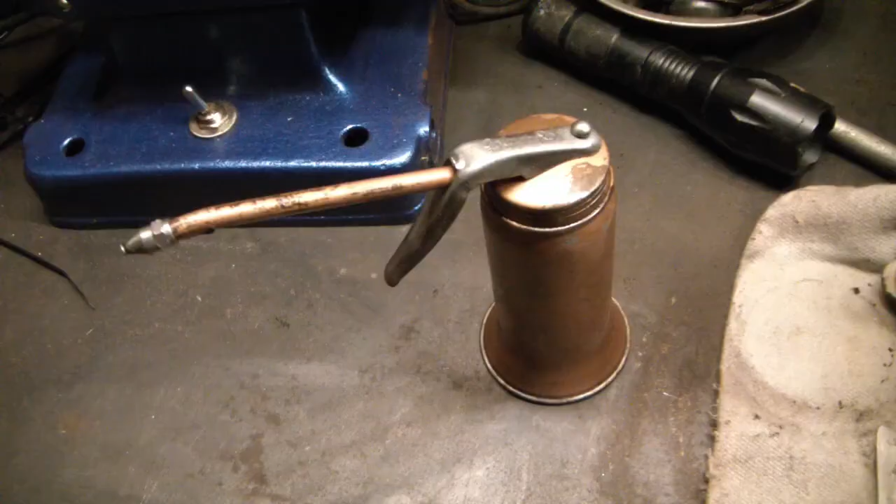Hey Toolerinos, we all love our oil cans, right? And this Goldenrod from a previous video has this flared out bottom to make it more stable, so it doesn't fall over so easily. So it's awesome, right?

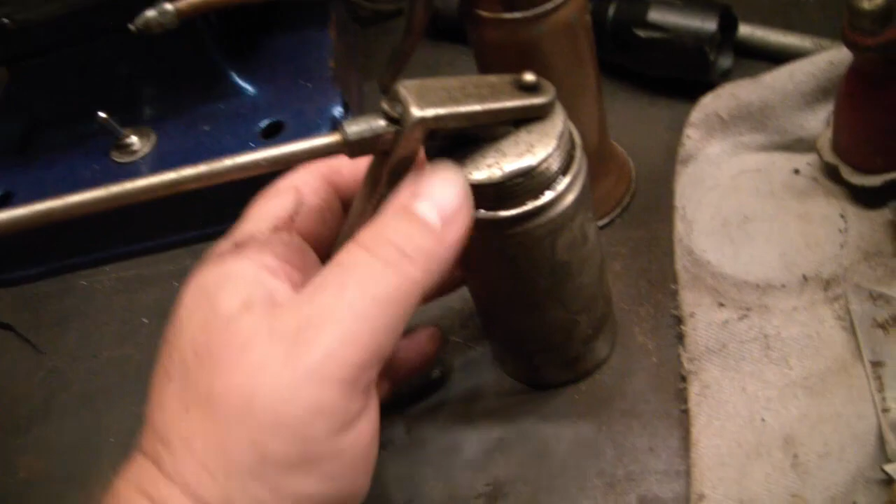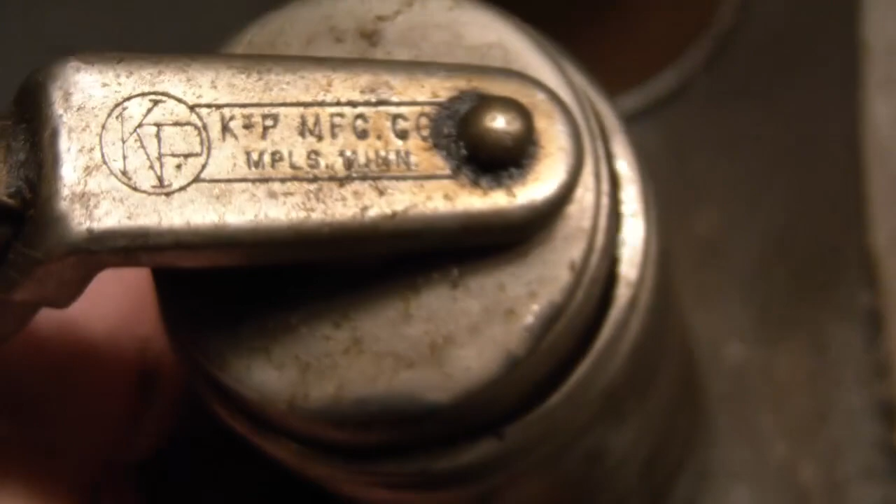A lot of times you see oil cans like that, and they're just straight bottom, and they fall over too easily because they're top heavy on one side, especially if they have a long oiling rod like this. And this is a pretty nice oil can. Let's see, it's K&P Manufacturing Company, Minneapolis, Minnesota.

So it's a nice oiler, but wants to fall over, right? Well, I picked this up at an estate sale, and look what was still attached to it. They had a little flared out base that you could set it in so it doesn't fall over. Pretty nice, huh?

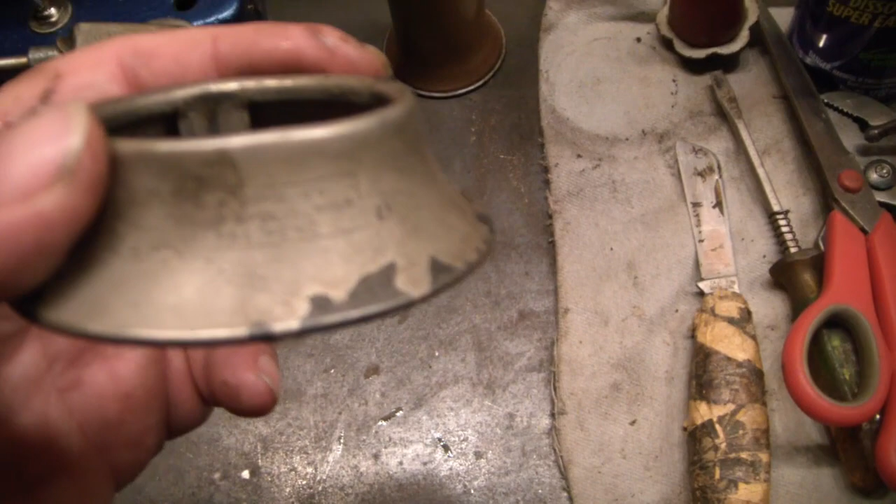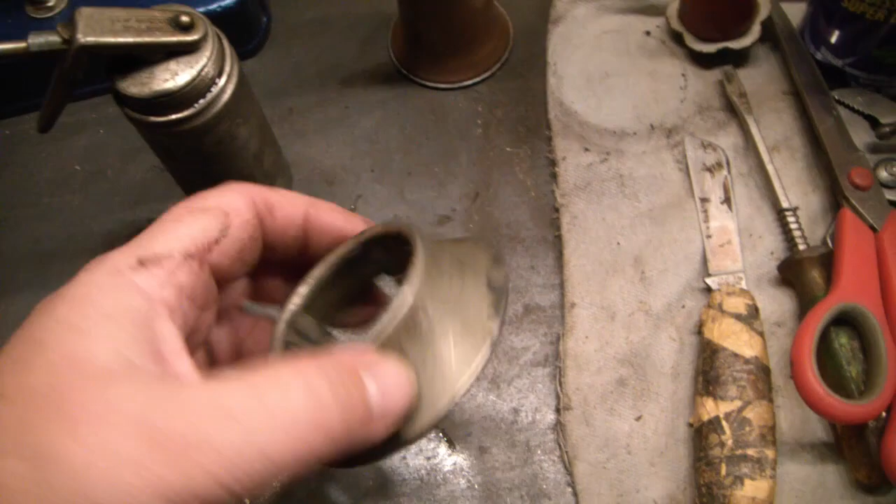Maybe a lot of them came like this, but they got lost, the little support got lost after a while. There it is, KP Manufacturing Company, Minneapolis, Minnesota, patent pending. Yeah, they patented it. That's why it's not on everything. Or they tried to patent it. I don't know, I'm going to have to look up that company and see if I can find a patent. If I do, it'll be inserted.

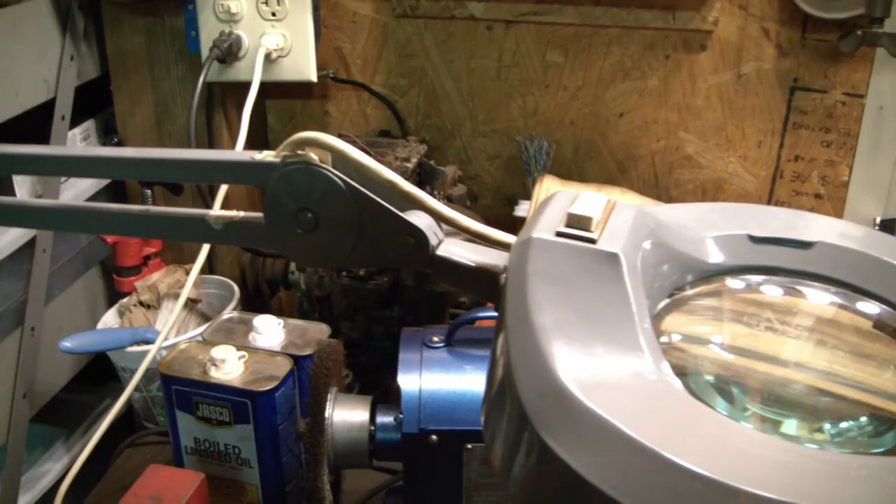Hey Toolerinos, I bet you're wondering what's attached to this arm. It is something I've been looking for a long time. I now have a proper industrial grade light of truth.

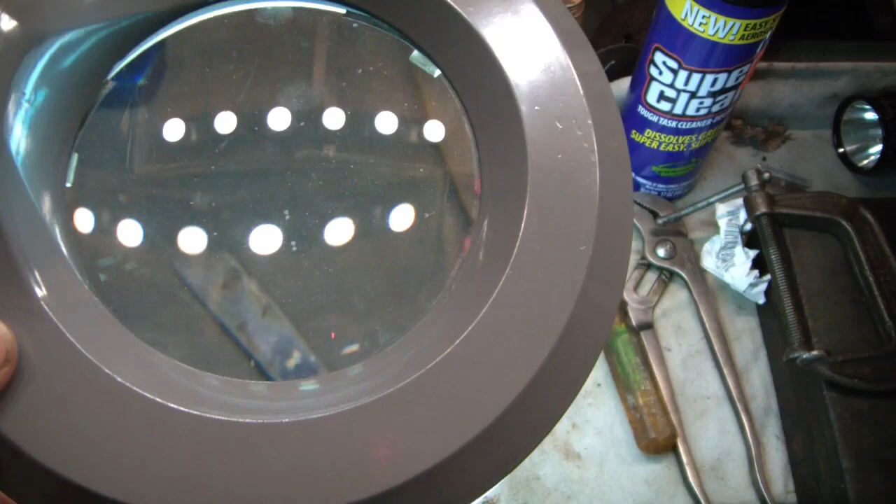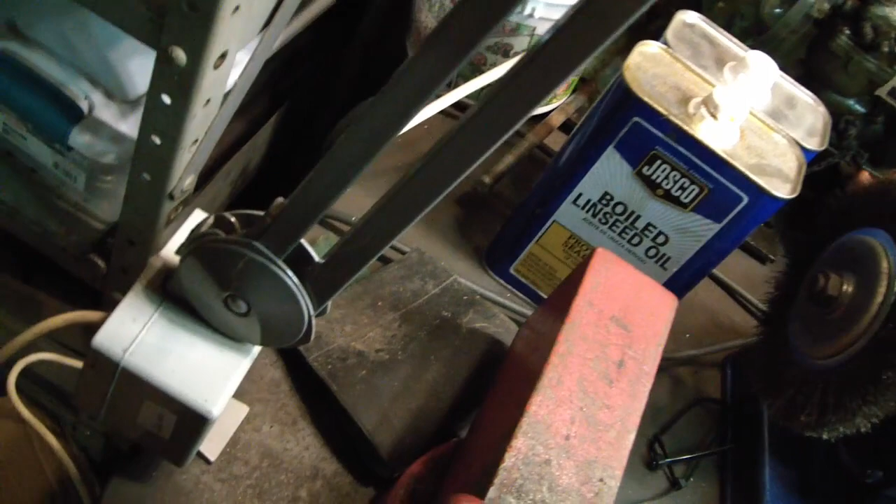Look at how well it magnifies. And it's got the fluorescent ring light underneath, and it works. So this is going to make a great addition to my shop. And it is a heavy duty type grade. The best part, I picked it up at Buckeye Salvage in Canton, Ohio for only $20.

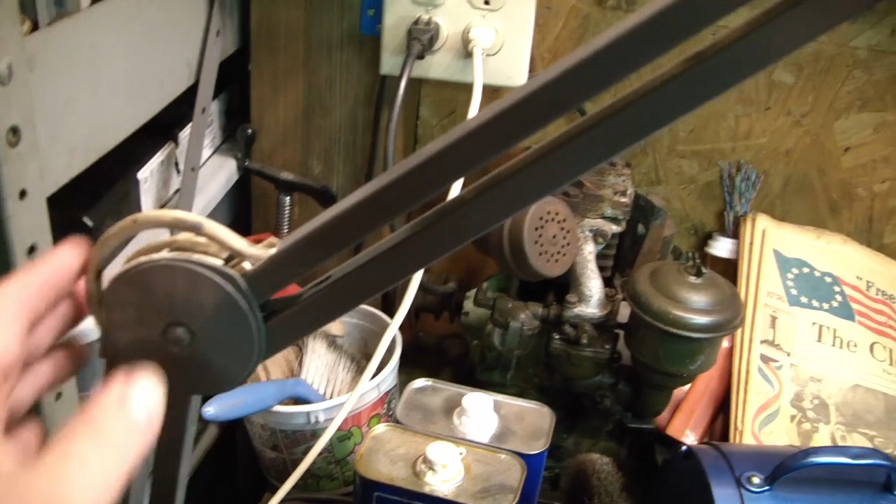Looking at the cord and everything, I would say this is probably a 70s or 80s model. It's not super old, but it works perfectly. So, huzzah! New addition to the shop.

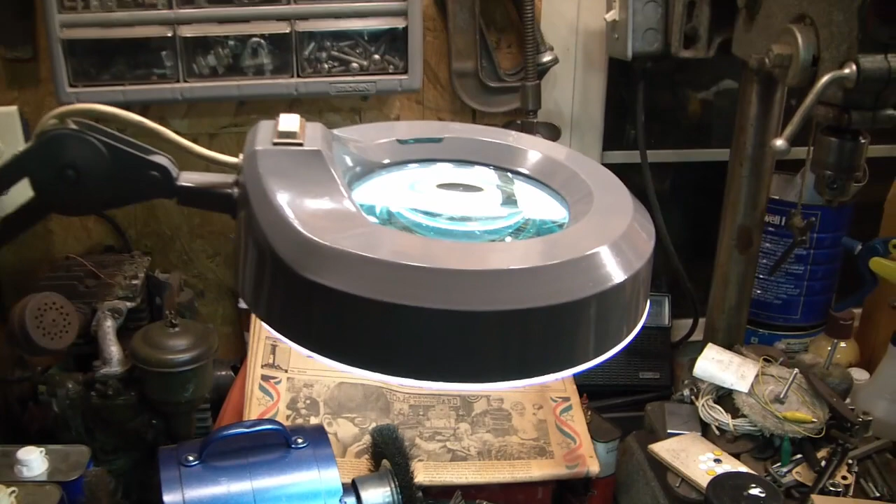Alright Toolerinos, what we have here is a real mystery tool. It's not a mystery of what it does, but it is a mystery for its brand, because I can find nothing online about it. So if anyone's ever heard of this or can give me any additional directions as to where to find anything, please let me know in the comments.

Speedwell Tool Corp, Cleveland, Ohio. And the rest of this is just barely legible, but there's a better image inside.

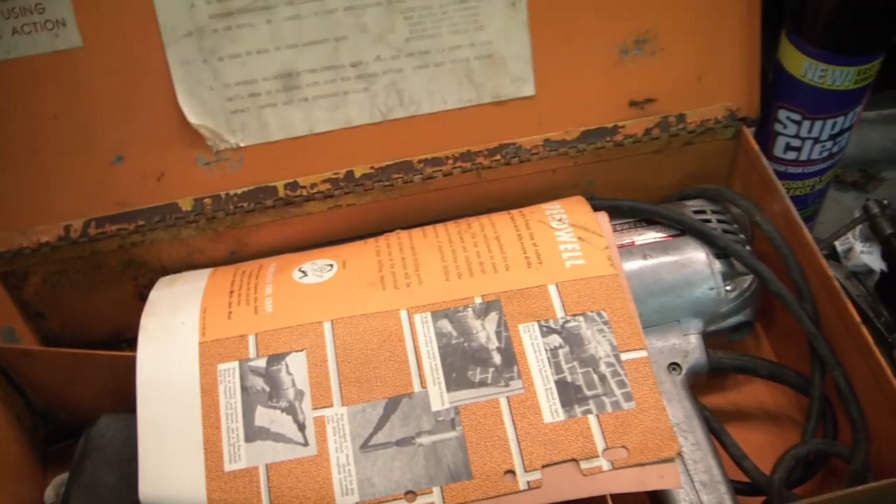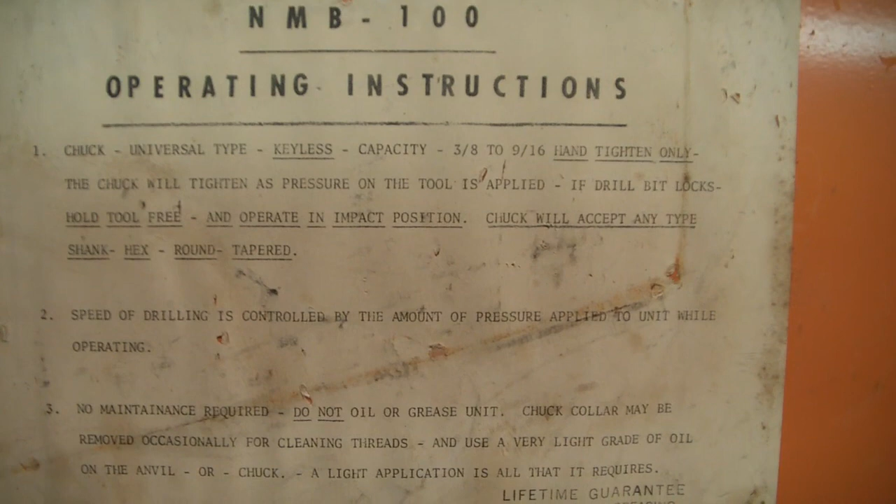So inside we've got this, on the underside it says NMB 100 with operating instructions. So it tells you how to work it. It tells you how to maintenance it, or not maintenance it, as the case may be, and to stop the motor before changing the selector. There's a lot of great information on these, which we will look at in a moment.

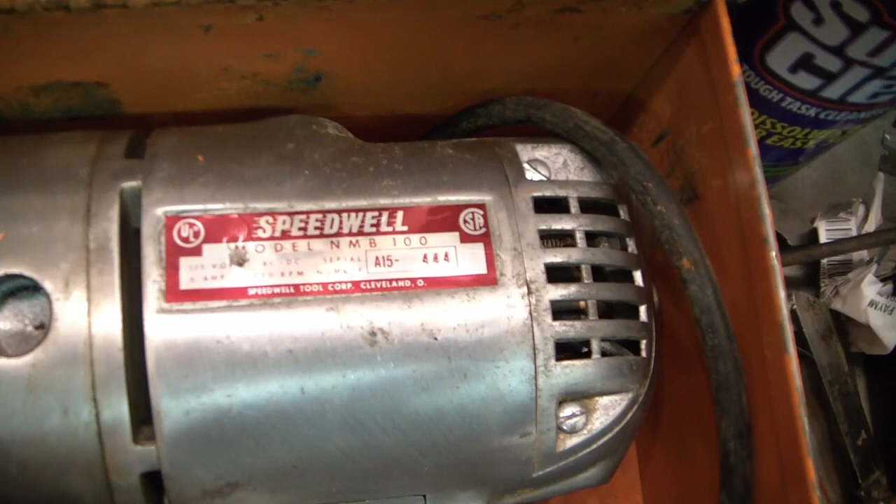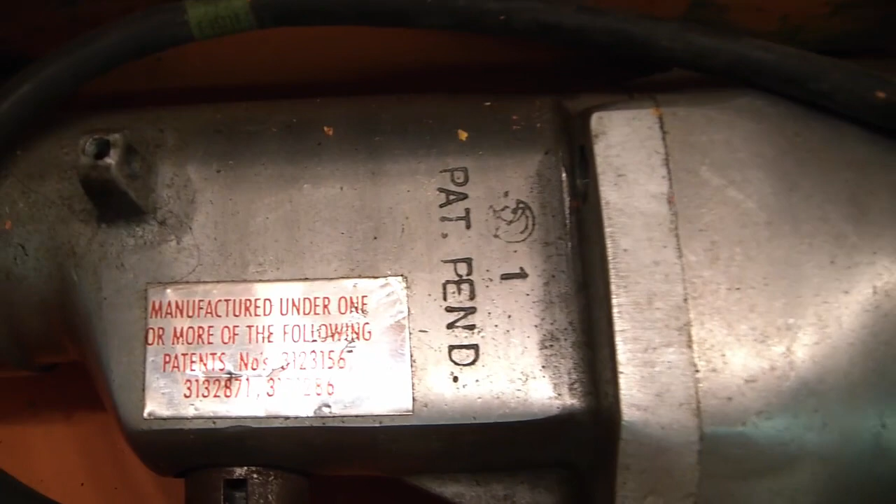But there it is, the Speedwell model NMB 100. Speedwell Tool Corp, Cleveland, Ohio. Patent pending, under one or more of the following patent numbers. So I will look up those patents and see what they show us.

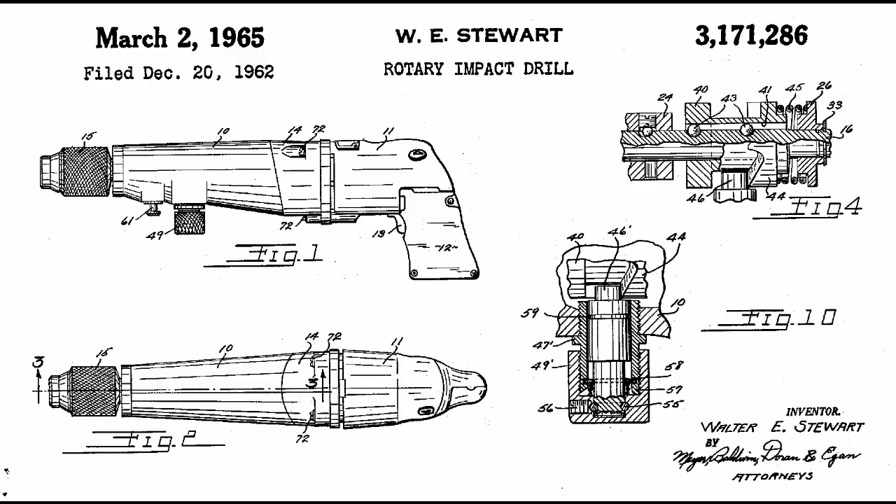In here we have what looks like it used to hold a drill bit, and it says the Speedwell Tool Corp, Masonry Drilling, 1392 Cranford Avenue, Cleveland, Ohio 44107, with a phone number.

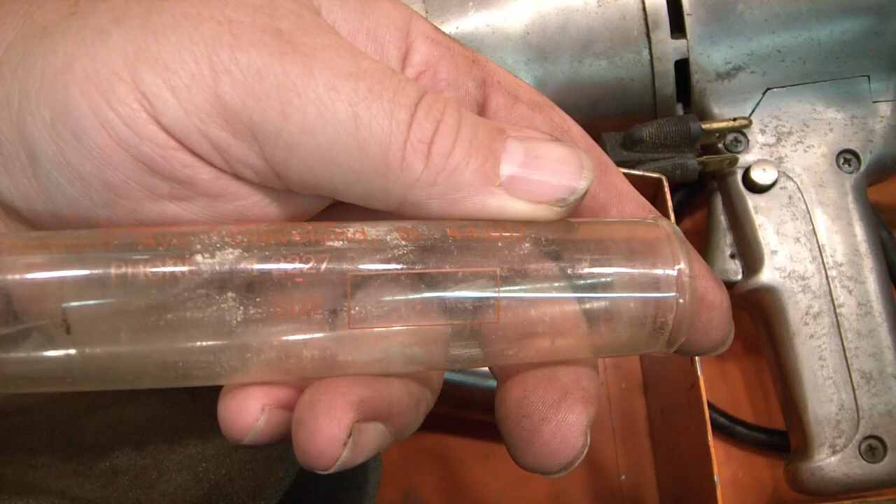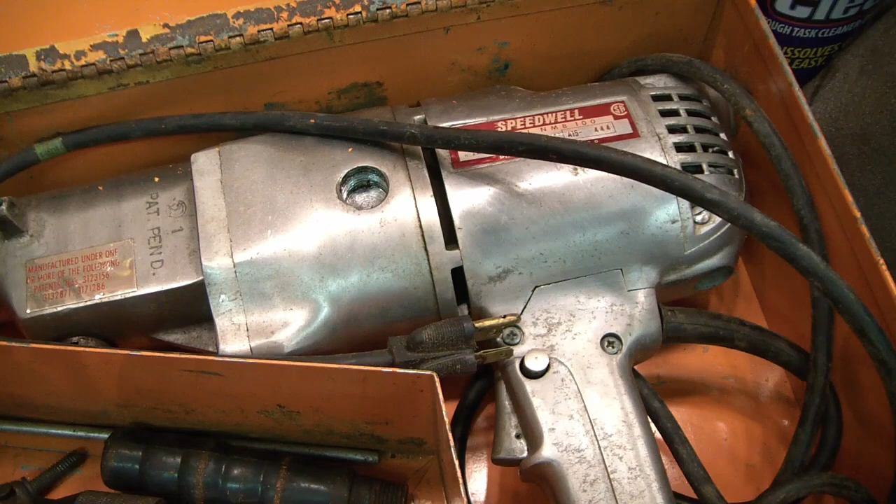Going to Google now, there is nothing there. You know, there's like a house, so I'm assuming somebody was running this business out of their house and they were really having this manufactured under contract by someone else, because there's no evidence of manufacturing at that site.

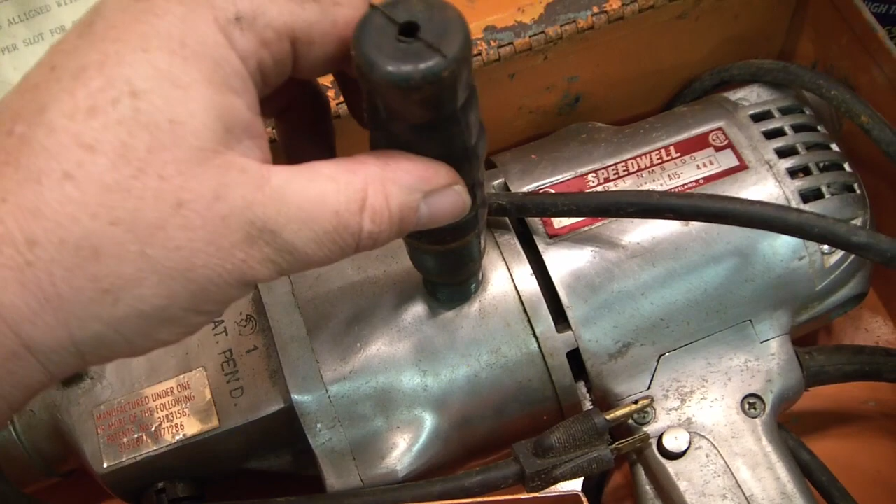There's a big rubber handle for screwing into either side for added grip. There's a big back handle to go on the back up there, facing that way. And here's the chuck.

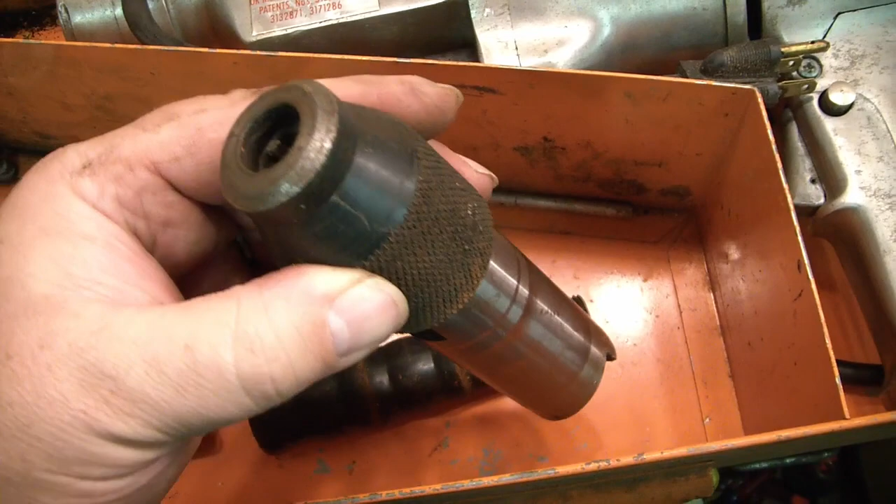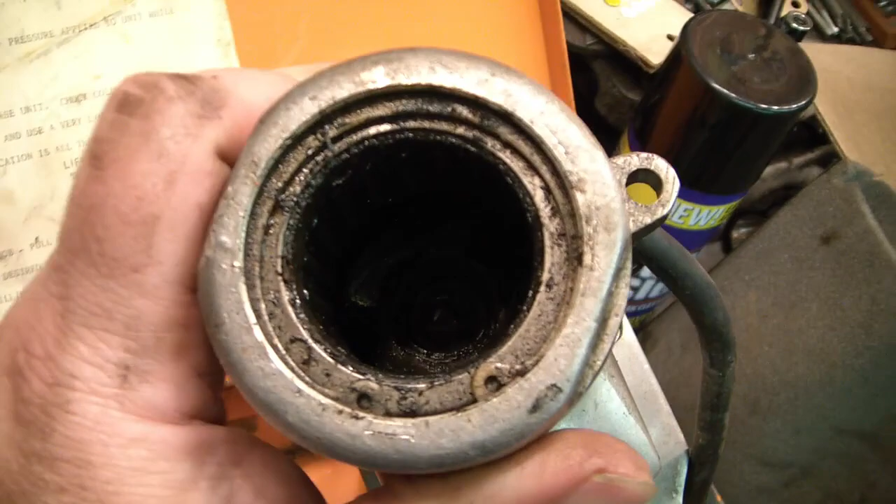Check it out. It has like 6 jaws in there to grip. Let's see what the inside looks like. And this thing's heavy.

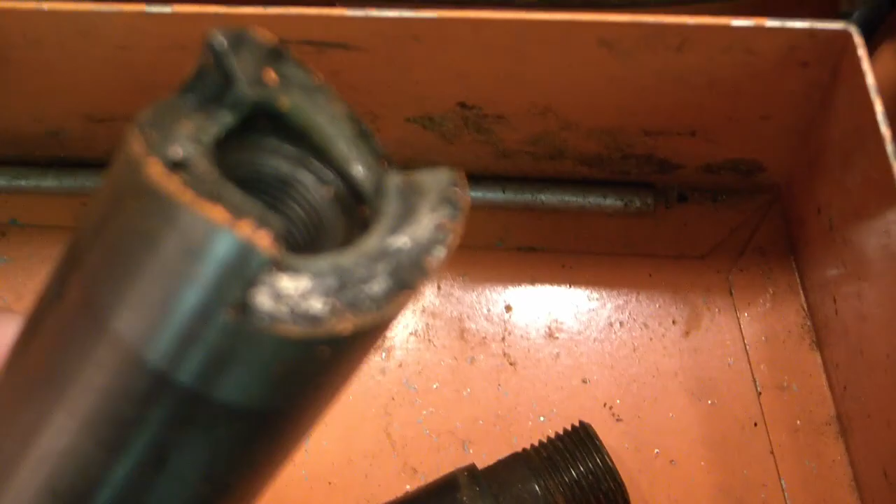It's got a roller bearing around the inside there, and that sort of slanted, fluted part to mate up with that inside there. If we look at the paperwork here...

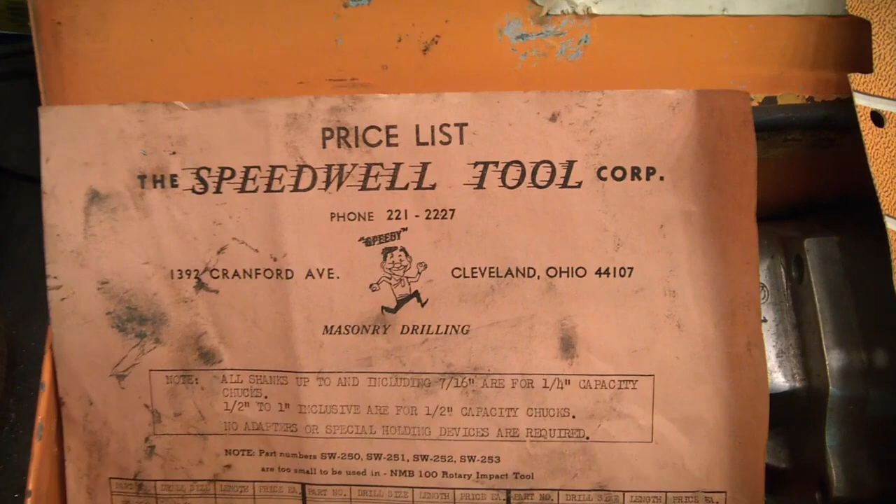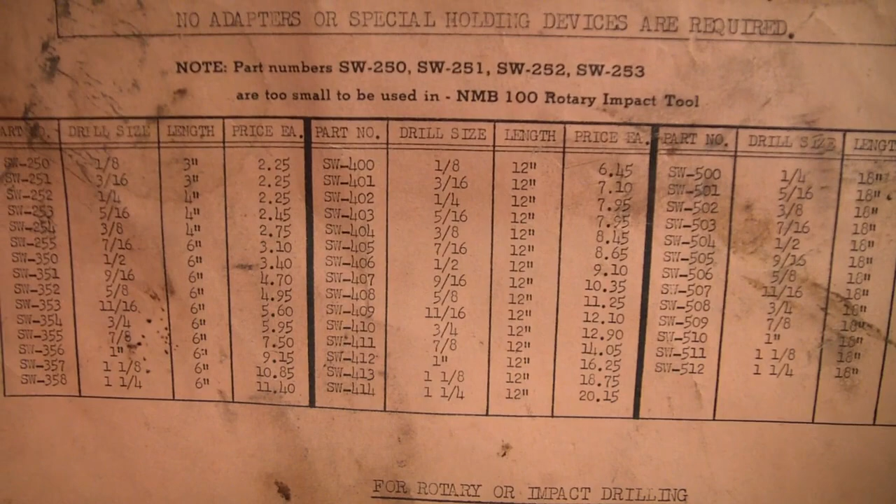We've got a price list, and they've got their little speedy running man there, and it tells you what size shanks you can use, and lists all these different sizes, and the part numbers, and the price for each.

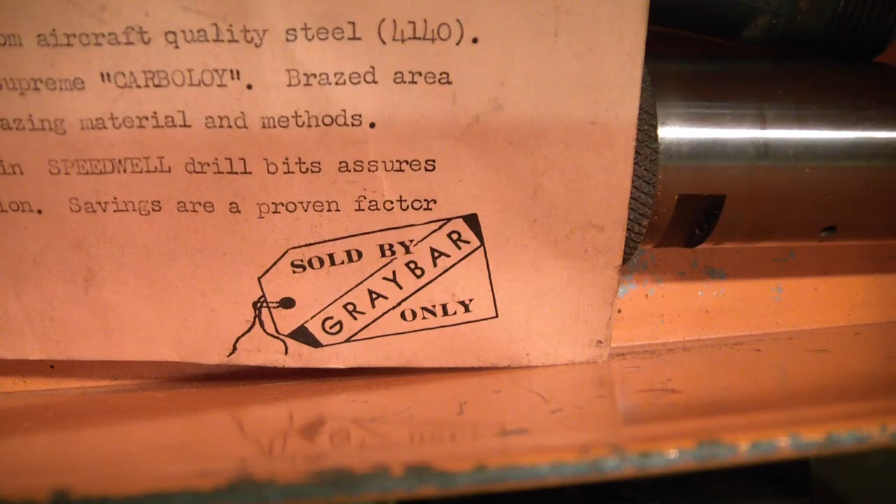Sold by Graybar only, so I guess that was some sort of supplier at the time. So interesting. And then there's this, you know, it would have been in some sort of binder for a salesperson or something, or at a store.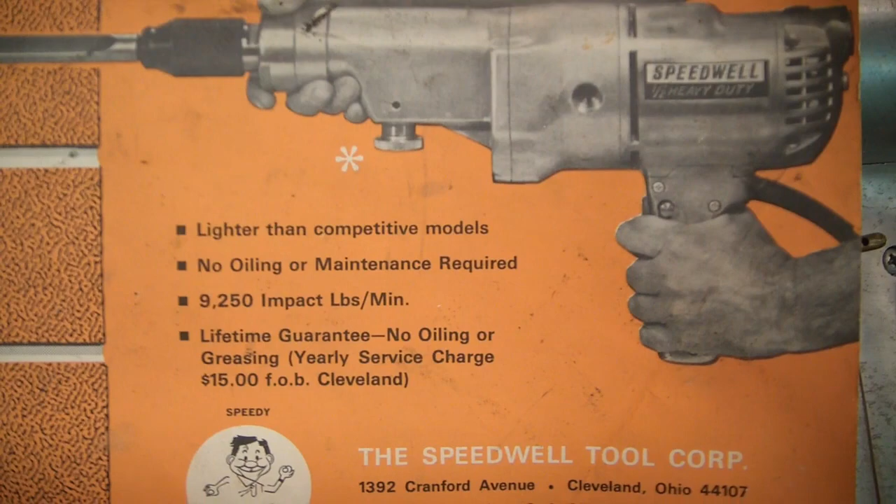Lightweight Speedwell, rotary impact tool, selective action, drill or rotary impact with the same tool. Lighter than competitive models, no oiling or maintenance required. 9,250 impact pounds per minute. Lifetime guarantee, etc., etc., etc.

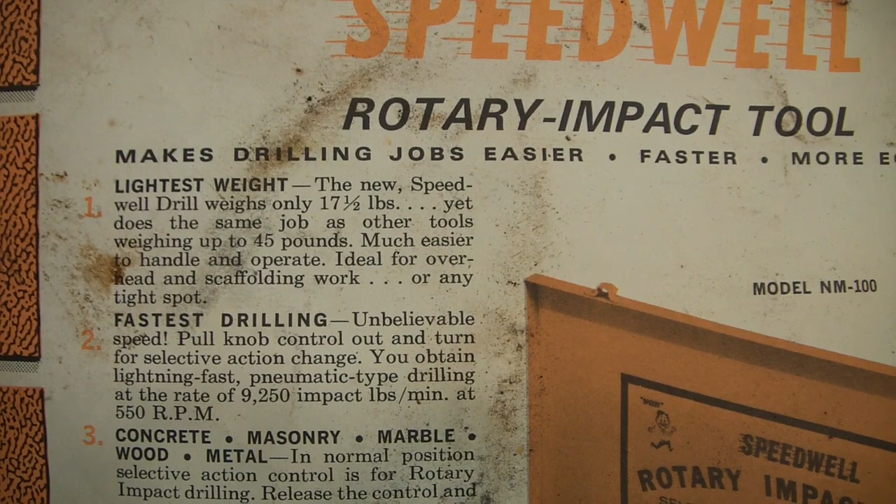So it says here, lightweight, the new Speedwell Drill weighs only 17.5 pounds, yet does the same job as other tools weighing up to 45 pounds. Ideal for overhead and scaffolding work or any tight spot. A 17.5 pound drill, impacting - boy, not for me.

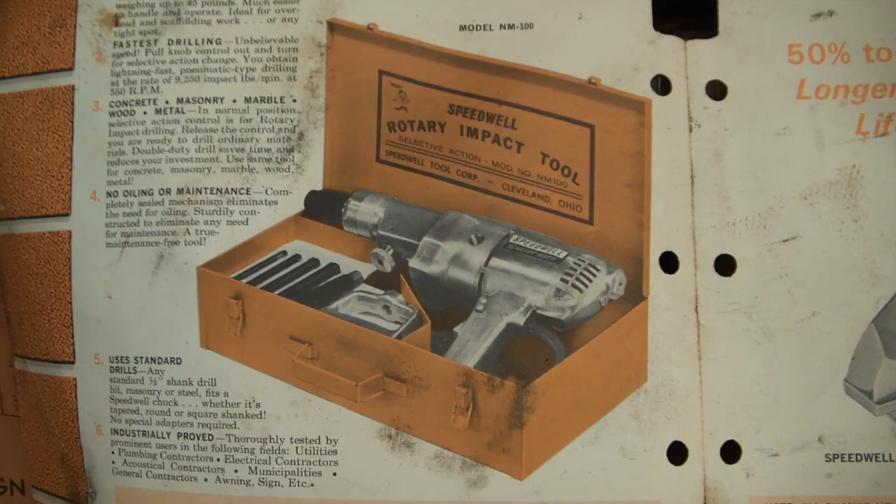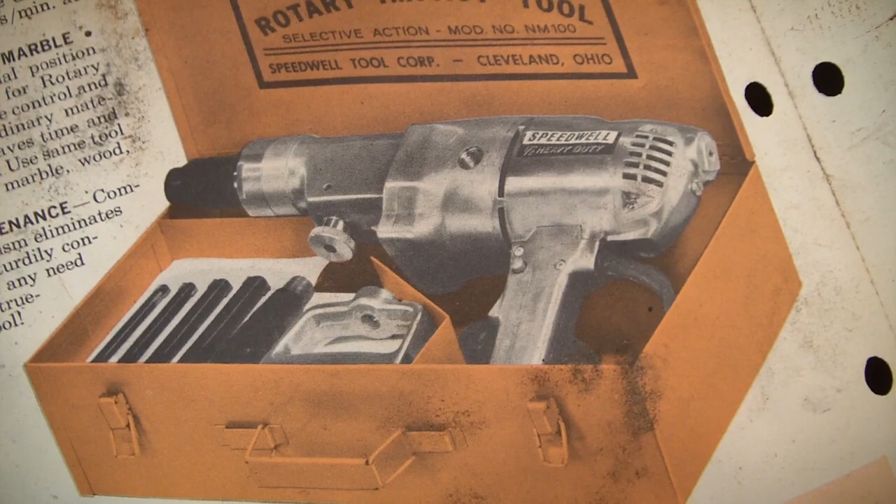But there's the image of what used to be on the front. So that's the logo that used to be on the front, and that's what the drill looked like. And you could see it had an array of bits, and the handle set onto the side there.

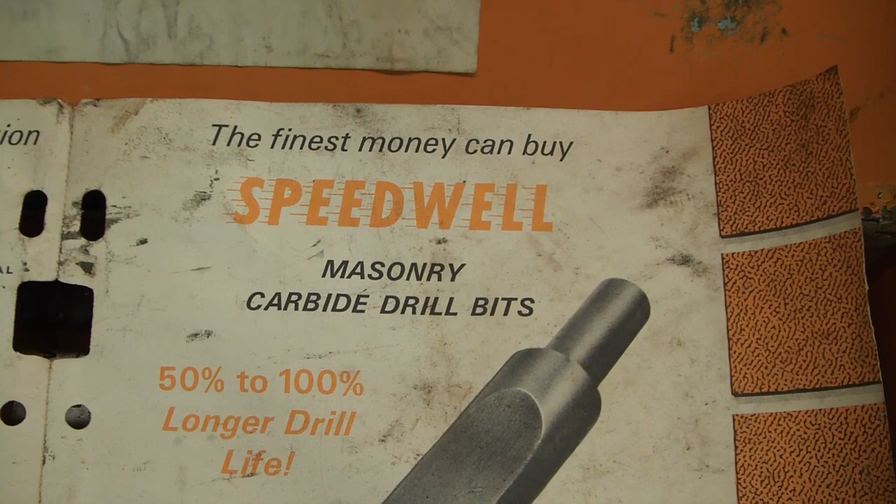It was only $267 back whenever this was new, which I have not figured out, but I'm assuming it was in the 70s, maybe late 60s. The finest money can buy, Speedwell masonry carbide drill bits.

50 to 100% longer drill life. GE carbide tip. And you got some more advertising here.

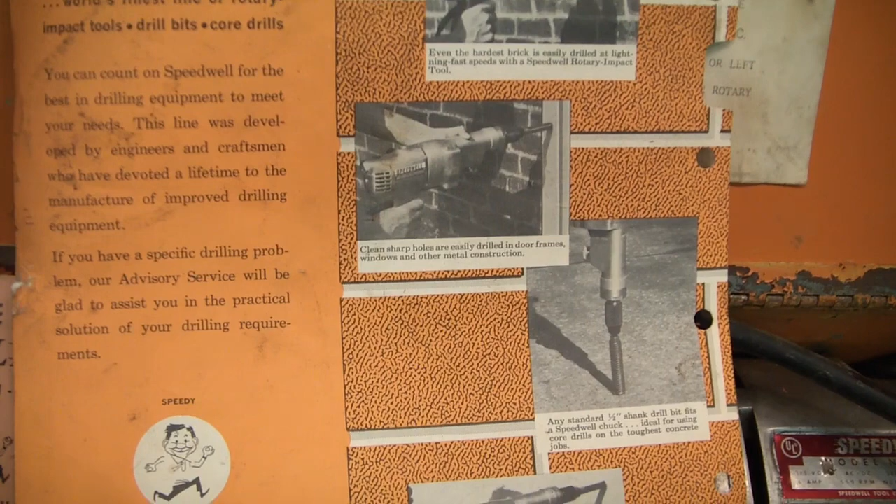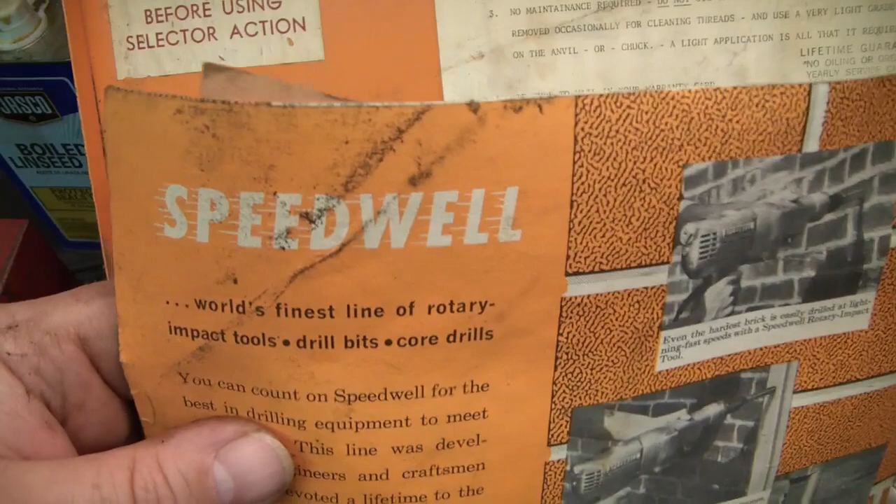So, as I said, I looked online. I cannot find anything about a tool company called Speedwell. I find all kinds of stuff about an old car brand from way back in the day that was called Speedwell, and it was made, I think, in the Dayton area. So there's just not an easy thing to find. If there's anything out there, I haven't found it yet.

And I wanted to look inside here at this jaw, because it has 6 teeth. Okay, I've never taken apart an impact drill before. I guess that's the plunger for pushing.

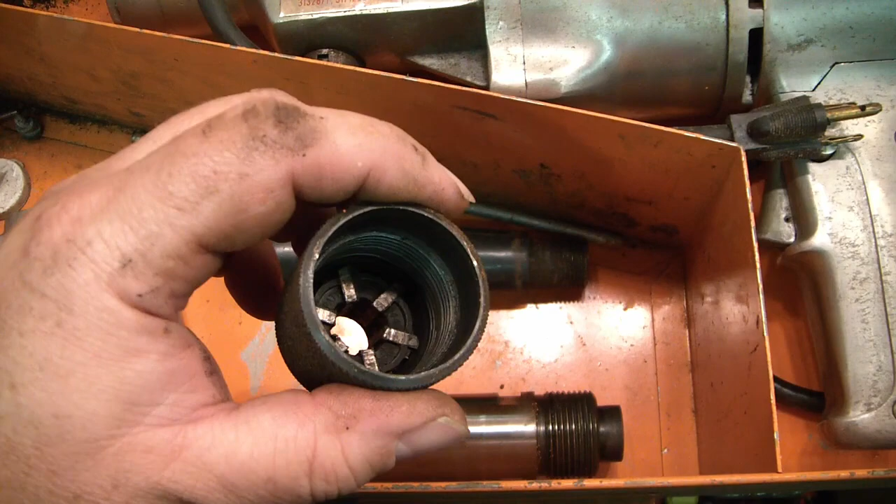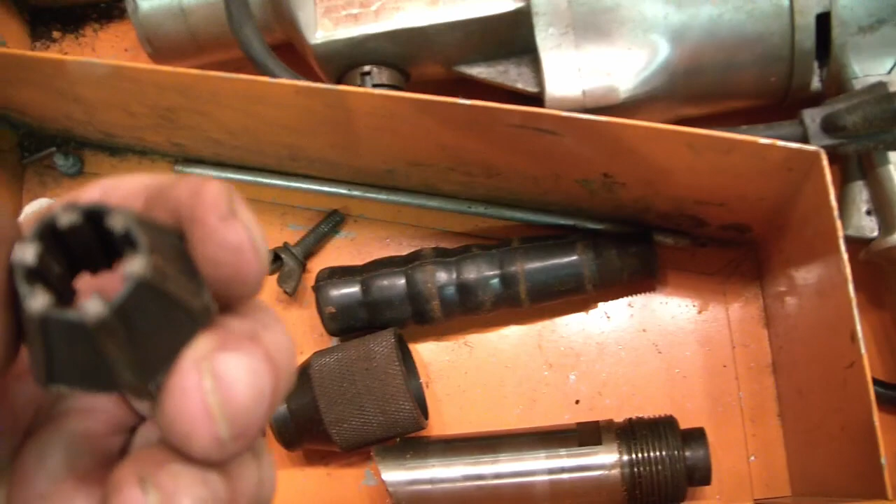Are they held in with rubber? Oh, there it went. So yeah, it's like a squishy rubber that holds these tapered pieces to function like a jaw.

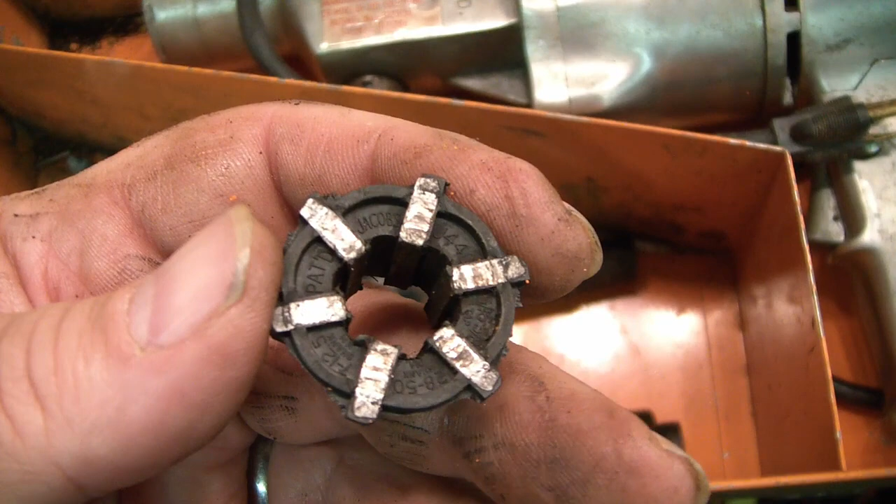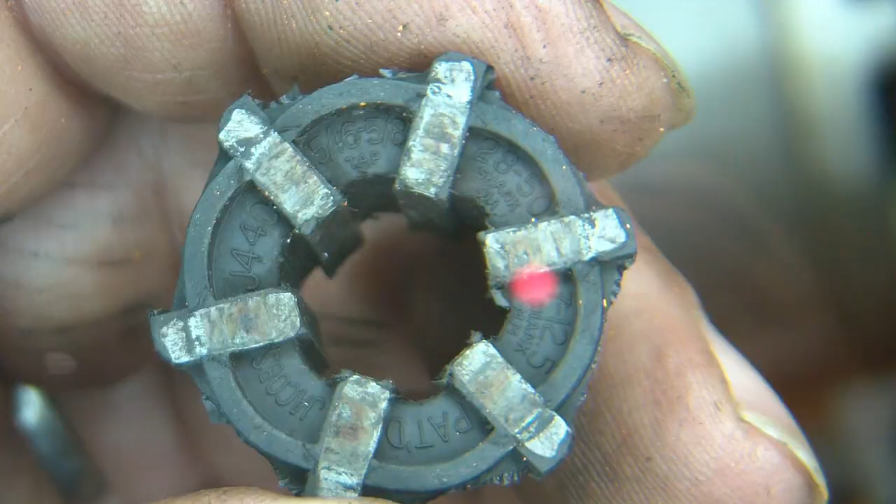Oh, it says something there. Jacobs. Patented. Hey, it's kind of hard to read. Let's try the new light of truth. Alright, well, it's a little bit dirty in there, but I think I'm reading the numbers alright.

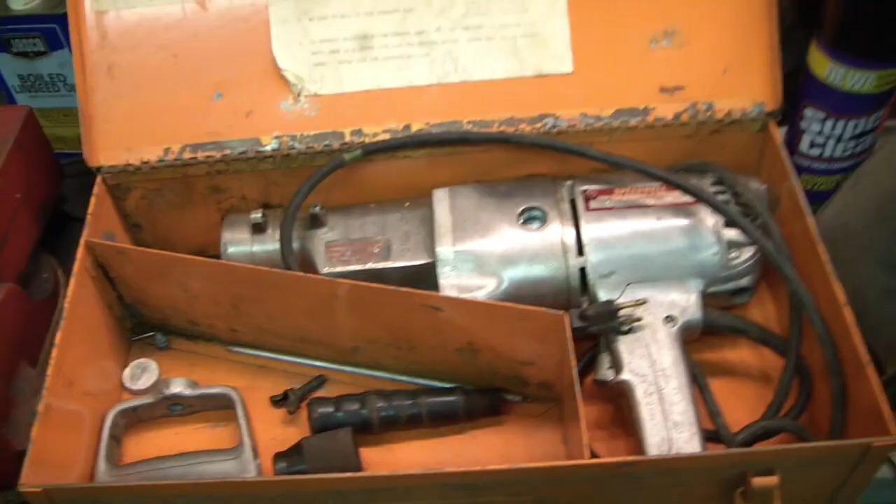Alright, so that's the new mystery tool. If anybody has seen one of these, has one of these, has used one of these, knows anything about this company at all, please let me know in the comments, because I just find it a fascinating mystery, but mysteries you don't solve have a way of gnawing at you. So let me know if anybody has any info or ideas of where to find info.